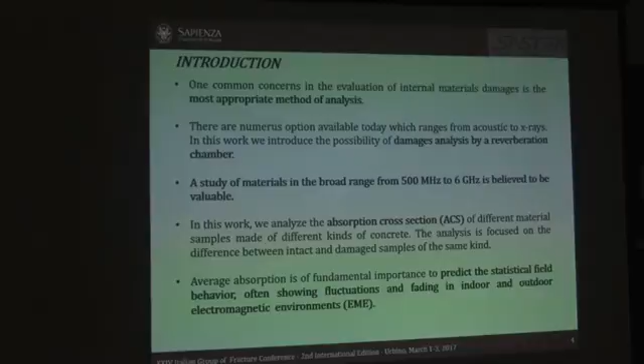So this paper is about the evaluation of damages, inducted damages on building materials by a method called reverberation chamber. One common concern in the evaluation of internal material damages is the appropriate method. The reverberation chamber is the method used for the analysis, and it is based on electromagnetic waves, in the range of this paper from 500 megahertz to 6 gigahertz.

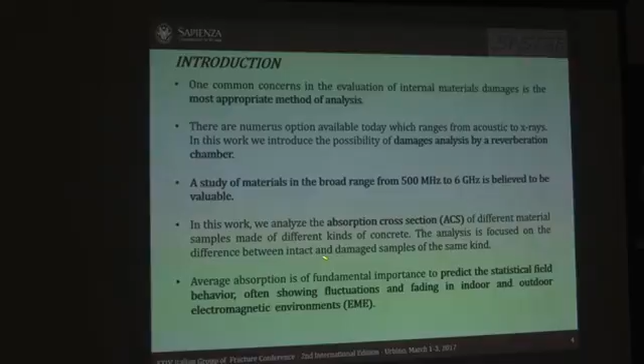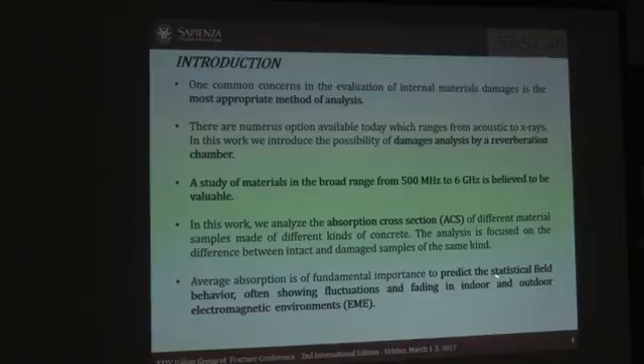And we analyzed the absorption cross-section, ACS, of different material samples made of different kinds of concrete. And the analysis focused on the difference between intact and damaged samples. The average absorption, that is the capacity of the material to absorb the electromagnetic wave, is of fundamental importance to predict the statistical field behavior, showing fluctuation and fading in indoor and outdoor electromagnetic environments.

Permittivity and permeability are intrinsic properties of the materials, but absorption properties depend on geometry and wave polarization and direction of incidence of the waves. So we have a lot of variables in this phenomenon, and the complete characterization of the absorption properties requires the repetition of the measurement using several angles of incidence and polarization. It is made by the use of mechanical procedures that include the statistical homogenization of the electromagnetic field distribution in the reverberation chamber. So they are made in such a way that the electromagnetic field is statistically uniform and isotropic.

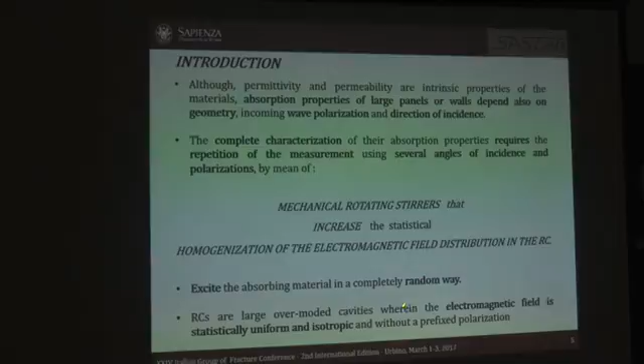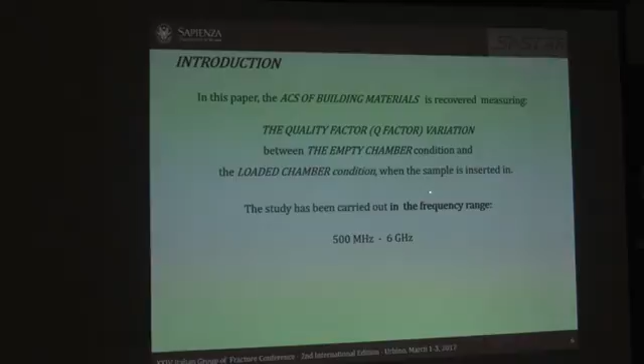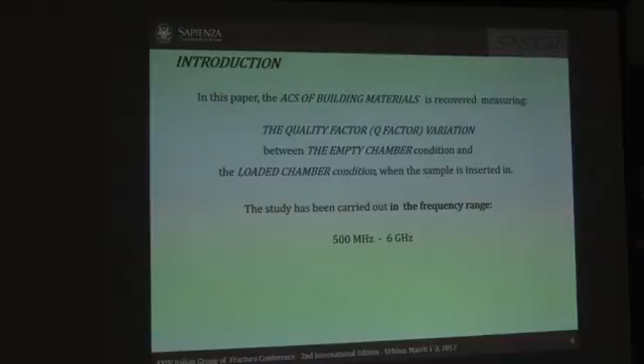In this paper, the ACS of the materials is evaluated, and the steps are evaluation of the quality factor of the empty chamber, so without samples inside, and the loaded chamber with sample in. The frequency range is this one. So we analyzed three kinds of concrete. The first one we call white concrete, and it is a cellular mixture of concretes and quartz sand. It is lightweight, waterproof, and fireproof. We analyzed bricks of laterite, vibration pressed concrete based on expanded clay, with some not specified additions, and bricks of simple concrete that is called CLS.

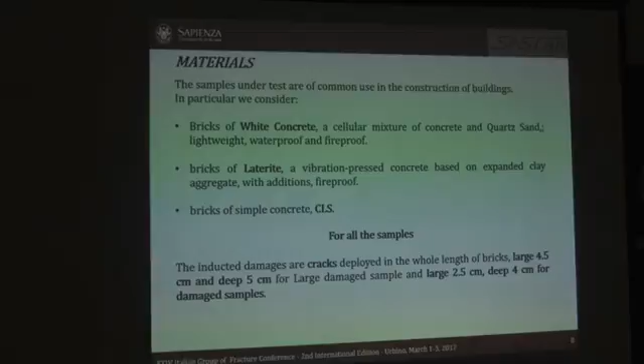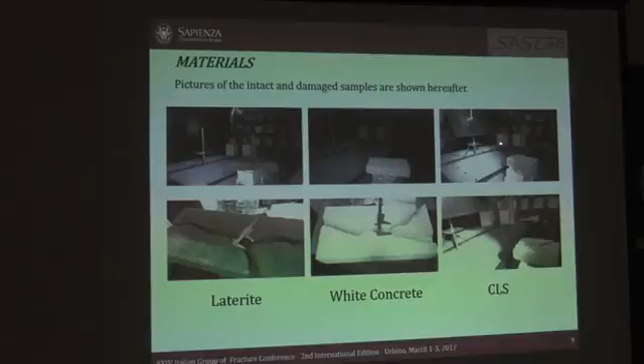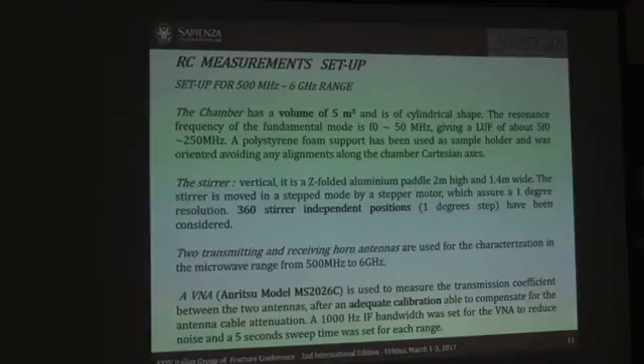Two transmitting horn antennas are used in the facility. The facility is completed by a VNA, vector network analyzer, an Anritsu, that is used to measure the transmission coefficient between the antennas, so S12, S21, and of course also S11, S22. The IF bandwidth is 1 kHz, and 5 seconds sweep time was chosen for the measure.

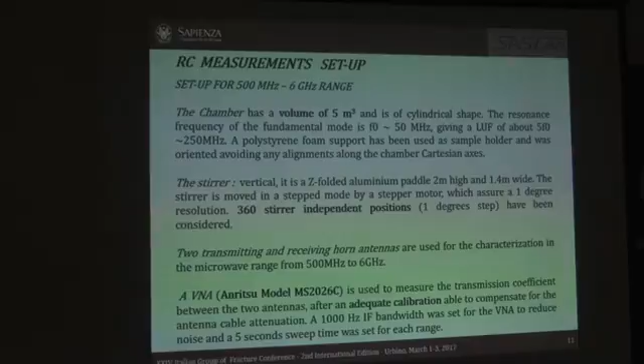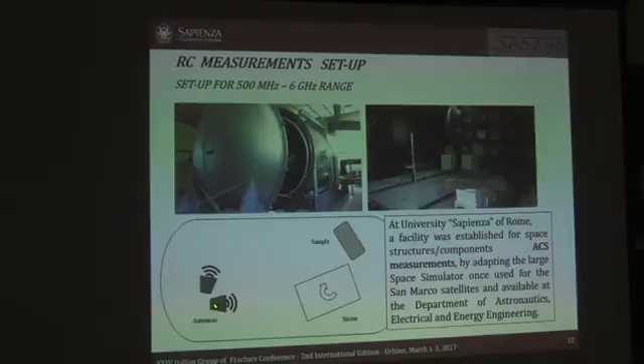These are some pictures of the chamber, and this chamber was used once as a space simulator for San Marco satellites. Now we are using it as a reverberation chamber. We had to cover these holes with aluminum foils. And here you can see how we arranged the chamber. We have 2 antennas, the stirrer, and the sample.

The ACS determination is quite a complex process. So, all the electromagnetic quantities have to be ensemble averaged over the stirrer rotation. So the ACS is defined as PS over SI, where PS is the power dissipated by the sample, and SI is the incident scalar power density. We consider ensemble average over the stirrer rotation and frequency stirring. So we have 360 measures, and we average every measure. So we obtain statistical uniformity of the total field magnitude.

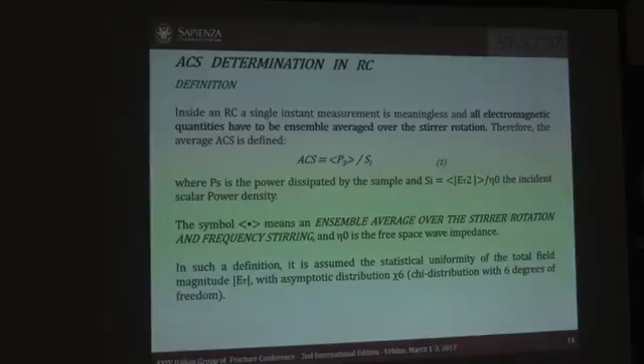Of course, spectral characteristics of a mode-stirred cavity are sensitive to energy perturbations. So we have to calculate total losses by many mechanisms: wall losses, antenna losses, and material sample losses. So we have to calculate the Q factor, that is the probability that the material has to absorb electromagnetic radiation.

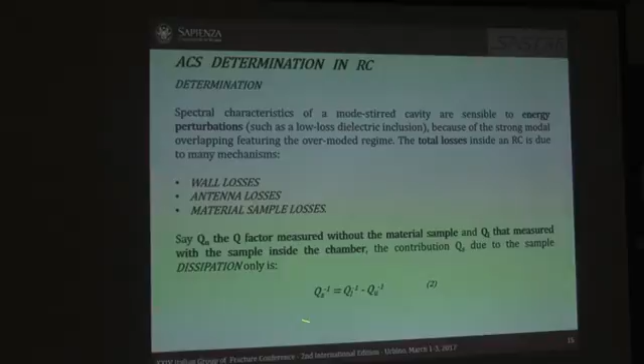It is only a number without any unit, and this is the formula, and QS is the sample, and Q0 is the factor measured without the material sample. Q is with the sample inside the chamber, and the contribution QS is the sample dissipation, that is the difference between the products.

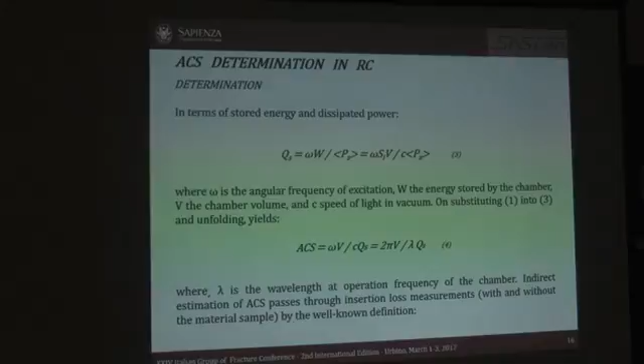After, we can go on to the ACS, that is calculated as a function of QS with the volume of the chamber and the lambda, that is the wavelength of the reverberation frequency at the moment of the measure. So for every measure we have a lambda, and we have to repeat the measure for every step. And this is the formula for Q.

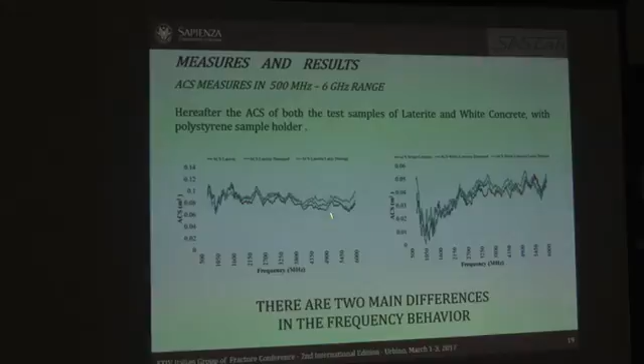We performed this measure, and we have on the left the laterite, and on the right the white concrete. And we have two main differences in the frequency behavior. The blue line for both the plots is the large damage. The green line is the damaged material, and the red one is the intact material.

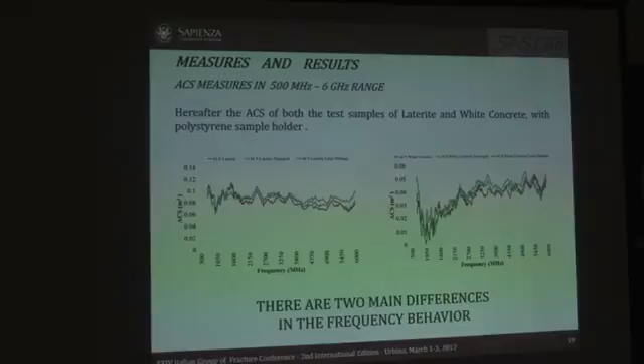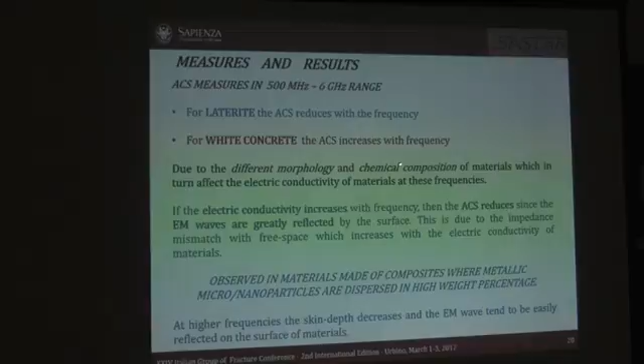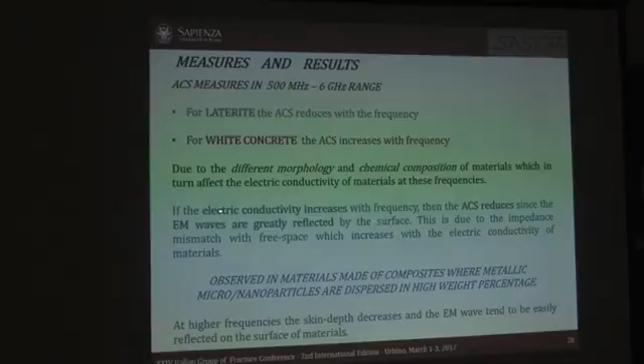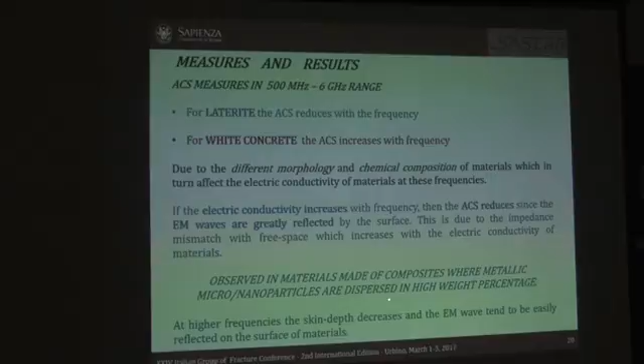For laterite, the ACS reduces with the frequency, while for white concrete, the ACS increases with the frequency, and this is probably due to different morphology and chemical composition of materials. For laterite, we can assume that if the electric conductivity increases, the ACS reduces, since the electromagnetic fields are greatly reflected by the surface. And it is often observed in composite materials where metallic micro and nanoparticles are dispersed in high concentration.

For the white concrete, on the contrary, if the porosity and the electric conductivity allow the electromagnetic wave to propagate, the electromagnetic waves are easily absorbed and converted into energy losses. In this scenario, the ACS increases.

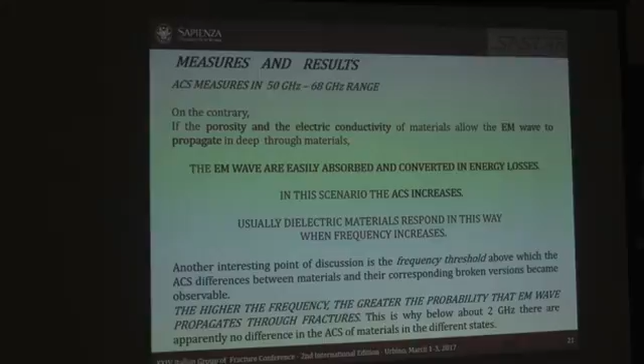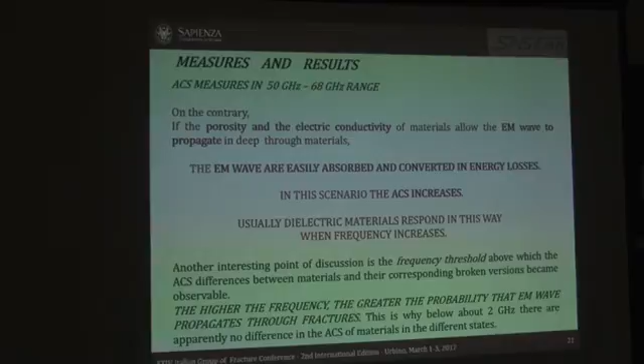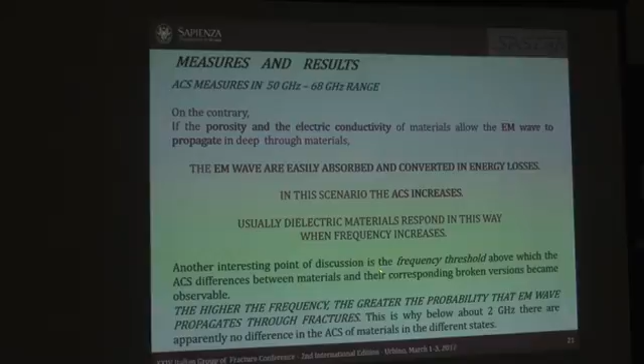We observed also a frequency threshold above which the ACS difference between materials and their corresponding broken versions became observable. And this is important because if we want to perform some other measures with higher frequencies, we have to consider which wavelength to consider. And the higher the frequency, the greater the probability that the electromagnetic wave propagates in the fractures.

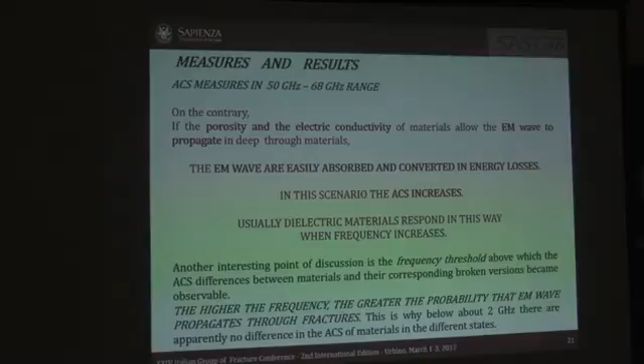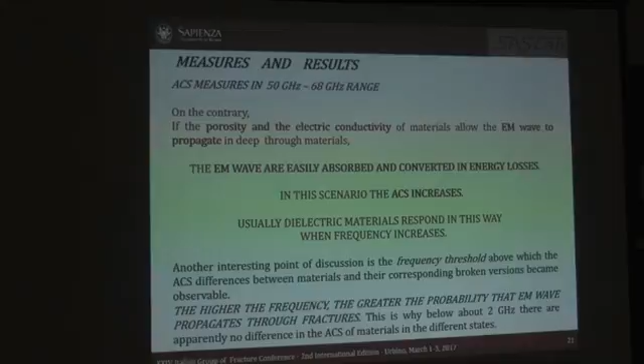And we observed then that below about 2 GHz, there is apparently no difference in the ACS of materials in this frequency range. Of course, if we consider, as an example, 20 GHz or higher, maybe we can observe a higher difference.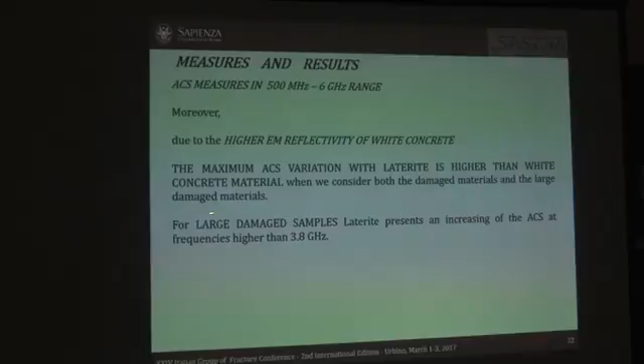So, due to the higher reflectivity of the white concrete, the maximum ACS variation with laterite is higher than white concrete material. And for the large damaged sample, laterite presents an increase of the ACS at frequencies higher than 3.8 GHz. This is the measure for CLS, and in this case, we observed only a small difference between the broken and unbroken material, and it is visible in the frequency range 2.4-3 GHz here.

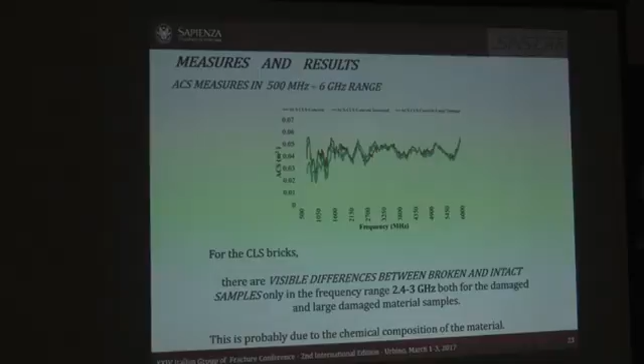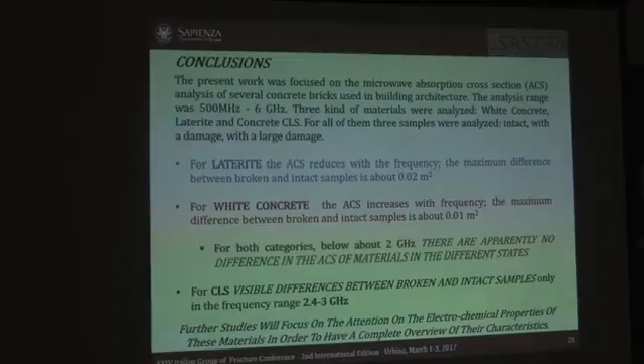In conclusion, we focused on the microwave absorption cross-section of several concrete bricks in the frequency range 500 MHz to 6 GHz. We considered laterite, where the ACS reduces with the frequency, and white concrete, where the ACS increases with the frequency. For both categories, below 2 GHz, there is apparently no difference in the ACS of materials. For CLS, we observed differences only in the frequency range 2.4-3 GHz.

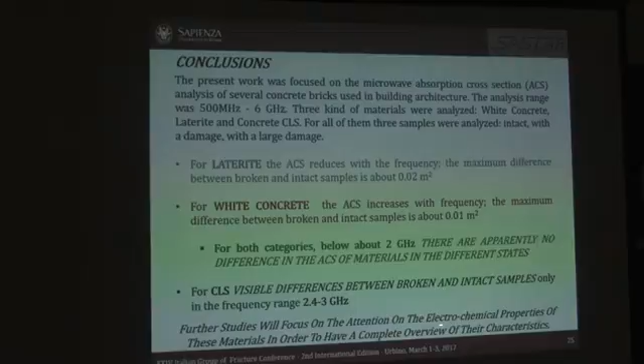Further studies will focus attention on the electrochemical properties of this material in order to have a complete overview of the characteristics. Thank you.